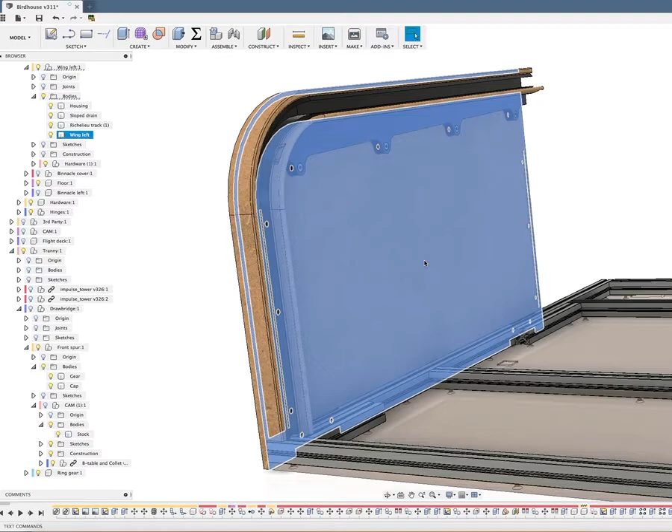This model here is the 3D model that I brought to Maker Faire essentially. And while I had this door hinged, there wasn't any mechanism that really constrained the door to that 0 to 60, 90 degree range, and there wasn't any mechanism for how this door actually lowers in real life.

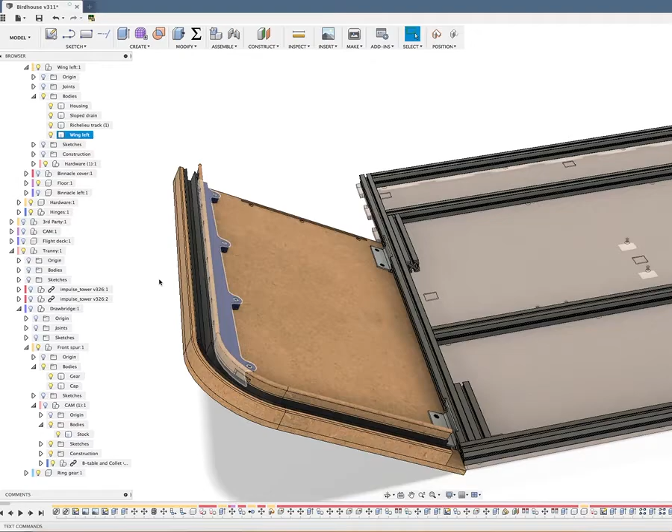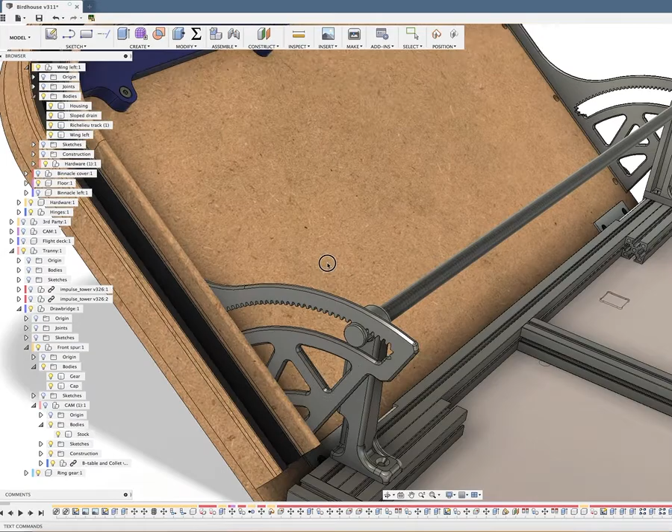So since Maker Faire, I've been working on this drawbridge mechanism, which is really just based on a drawbridge style lowering system. You've got these geared braces that are bolted to the door, and this geared drive shaft that runs between them. When you raise and lower the door, you can see how this drive shaft is driven with a gear over here.

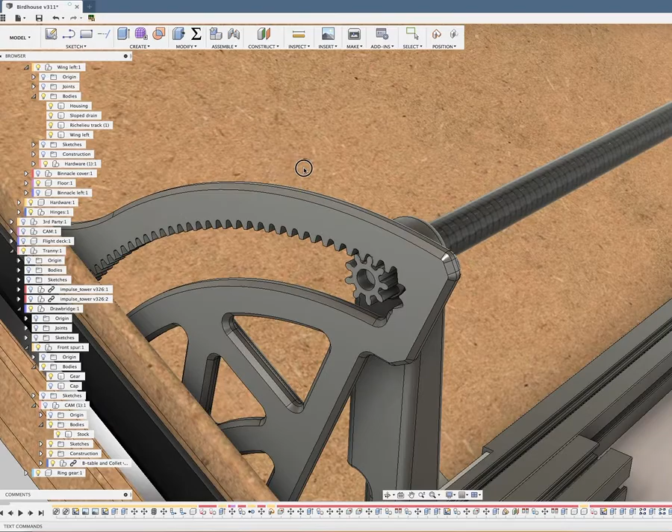You don't see the timing belt, but there's a timing belt that drives this gear. It turns this whole drive shaft, this carbon fiber drive shaft, and you can see this cap moving, how this thing sort of opens and closes and comes down and parks in that little park down there.

Anyway, the focus of the talk was how to make this particular gear, which I 3D printed everything, but I wanted it out of something harder in plastic and better machined.

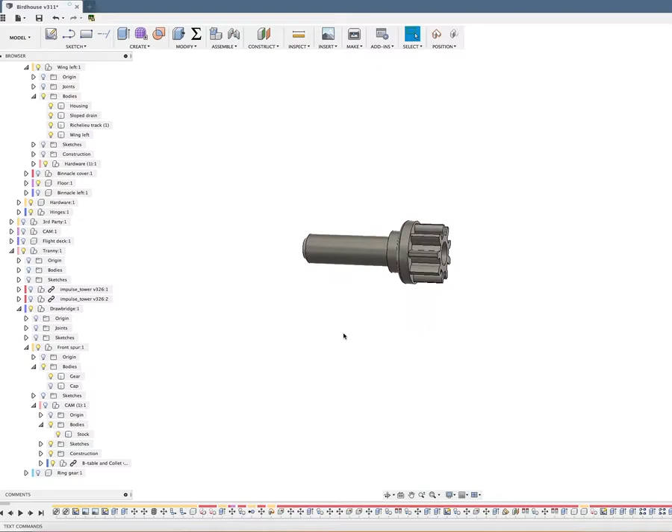So I can show you how that thing gets cammed. This is the little gear, it's only like 1.5 inches long, very tiny.

I'll turn on the cam fixture. This is a model, a representation of the vise in the Pocket NC. The white stuff is 1 inch thick Delrin stock rod that's going to be milled out to create this gear.

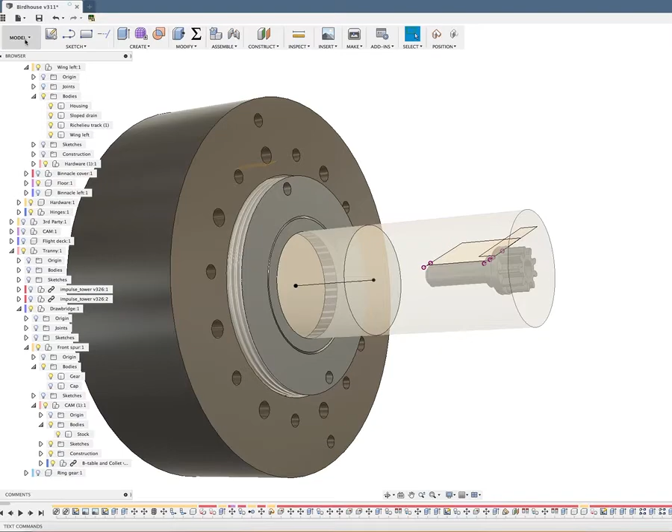I'm going to switch into the cam workspace where all my cam strategies are. I will do a regen on all of these, what are called strategies - these are paths that a cutting tool will take to carve out this piece. When you switch out and come back into cam, it invalidates your workflows, so I have to do a regen.

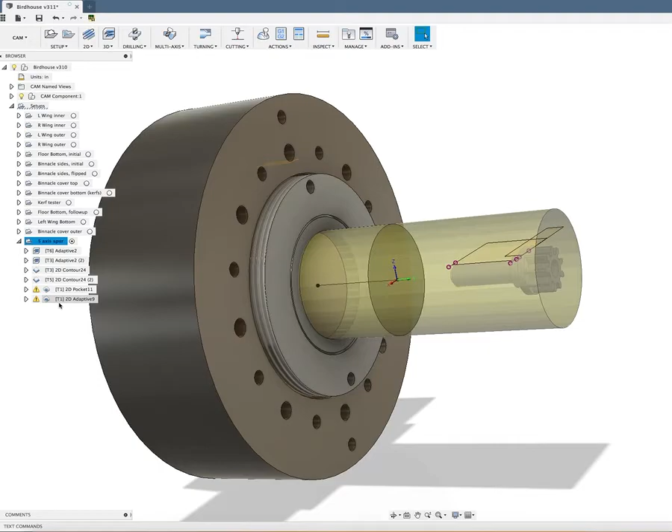If I highlight all these, you can see these are called tool paths - computed paths of a bit to cut out this part. And I can run those in simulation.

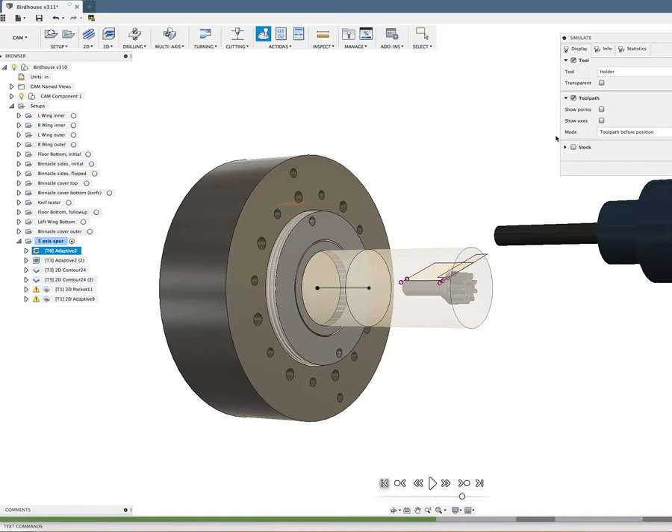It'll take a little while to fire up the environment. I'll go back to the beginning, show the stock, turn off the tool holder so you just see the bit. We're going to start with a 1/4 inch bit, and run that down all the way into a 0.5 millimeter bit. I'll start simulation and speed it up a bit here.

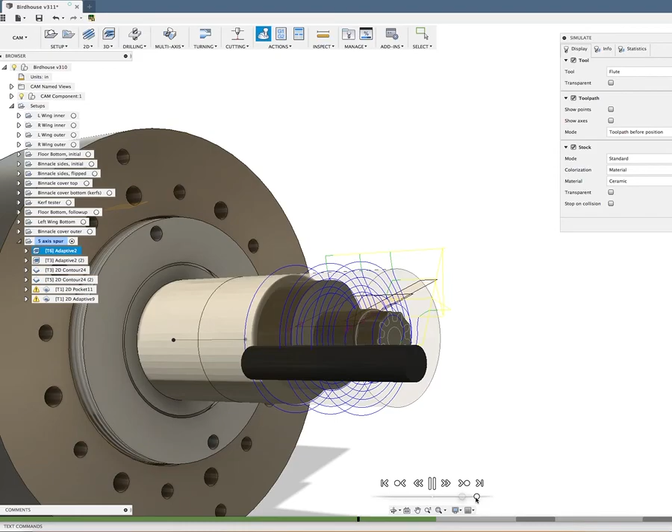Then we'll move after this down to the smaller bit - I'll slow these down a bit. And then now we get the really tiny bit, which is really taking out that gear to shape it.

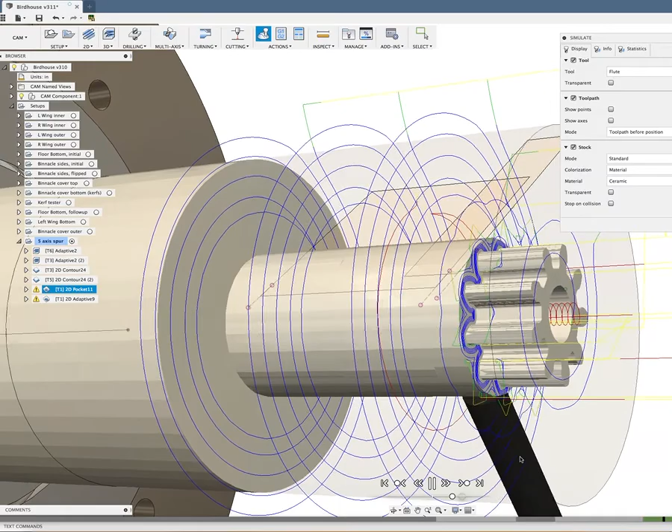And then finally we finish with an 1/8 inch bit that comes in from the side, and that's actually clearing out the side profile and creating a 5 millimeter axle. And there you go - anyway, so that was the talk, just showing how that process works, that workflow. And there you go.